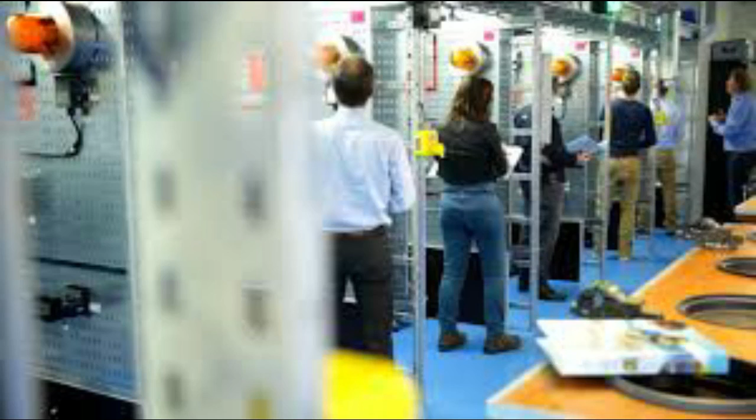CompEx training courses have been run in Aberdeen College since 1990 and have developed to the level of sophistication we have today. In its present form, the CompEx course has been in operation since August 1994, designed and constructed specifically for the national training of personnel who work with electrical installations and plant in hazardous and/or potentially explosive environments. The objective is to introduce candidates to operating procedures and techniques, and to give candidates and their employers confidence that they are competent to work on electrical apparatus in such environments. This competence, laid down nationally by industry, will help make your industry a safer one.

This first part will cover the nature of flammable materials, gas grouping, basic principles of area classification, temperature codes, ingress protection, standards, certification, and marking of explosive atmospheres.

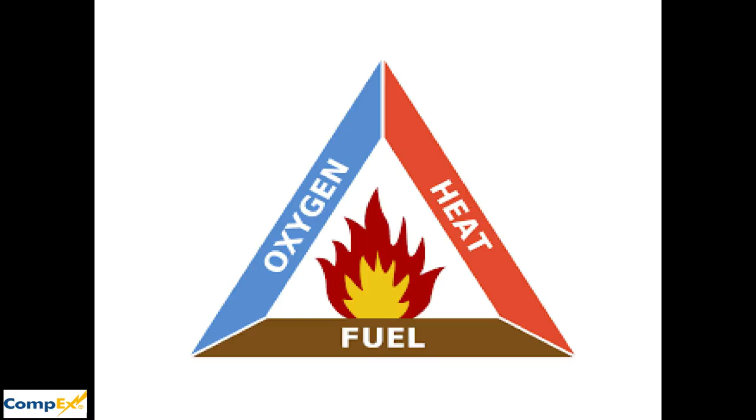First, a definition of the fire triangle. The fire triangle represents the elements which must be present before combustion can take place. Each point of the triangle represents one of the essential elements, which are: fuel, which can be in the form of a gas, vapor, mist, or dust.

Oxygen, plentiful in supply since there is approximately 21% by volume in air. And source of ignition, which can be an arc, spark, naked flame, or hot surface.

Chemical reaction is the interaction of two or more chemicals that produce one or more new chemical compounds, or alters the properties of the mixed chemicals. Most reactions require heat, pressure, radiation, other conditions, and/or the presence of an accelerator.

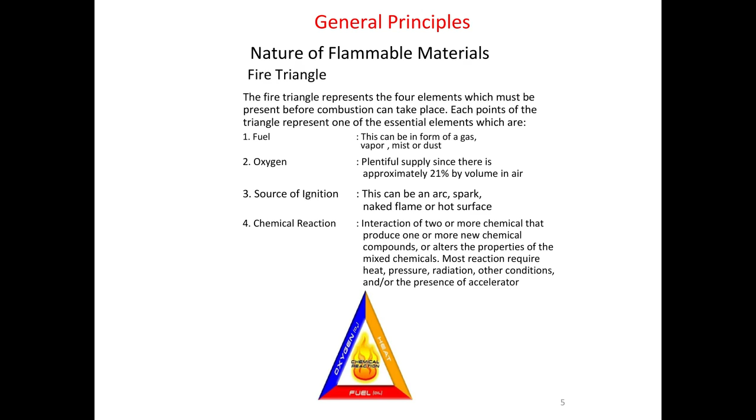Now we are going to go through the nature of flammable materials. Let us first understand how combustion happens. Combustion will take place if all three elements, in one form or another, are present, the gas and air mixture is within certain limits, and the source of ignition has sufficient energy.

The removal of one element is sufficient to prevent combustion, as is the isolation or separation of the source of ignition from the gas and air mixture. These are two techniques used in explosion-protected equipment.

Other protection techniques allow the three elements to coexist and either ensure that the energy of the source of ignition is maintained below specific values, or allow an explosion to take place and contain it within a robust enclosure. These techniques are addressed in the various sections of this manual.

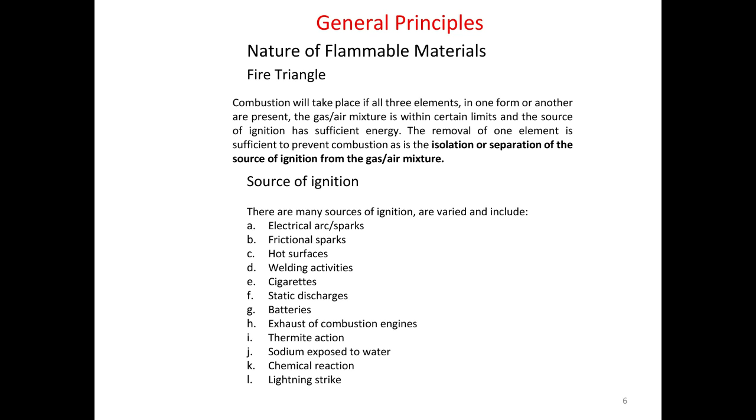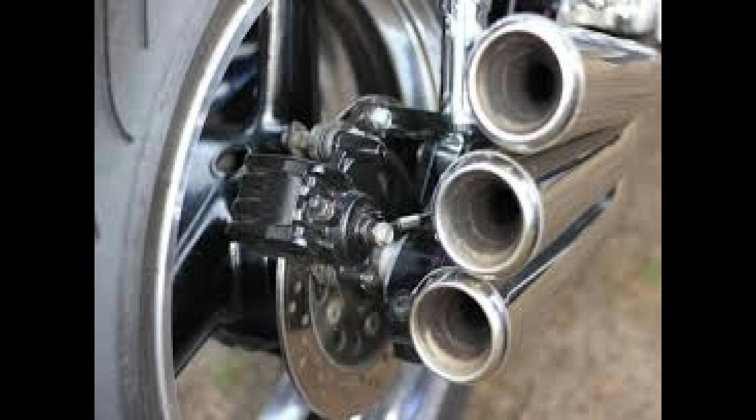There are many sources of ignition, varied and including electrical arcs/sparks, frictional sparks, hot surfaces, welding activities, cigarettes, static discharges, batteries, exhaust of combustion engines, thermite action, sodium exposed to water, chemical reaction, and lightning strikes.

Combustion will only occur if the flammable mixture, comprising fuel in the form of a gas or vapor, and air, are within certain limits. These limits are the lower explosive limit (LEL) and the upper explosive limit (UEL), and between these limits is known as the flammable range.

An everyday example of this is the carburetor of a petrol engine, which must be tuned to a particular point between these limits in order that the engine may function efficiently.

Lower explosive limit: when the percentage of gas by volume is below this limit, the mixture is too weak to burn, i.e. insufficient fuel and/or too much air.

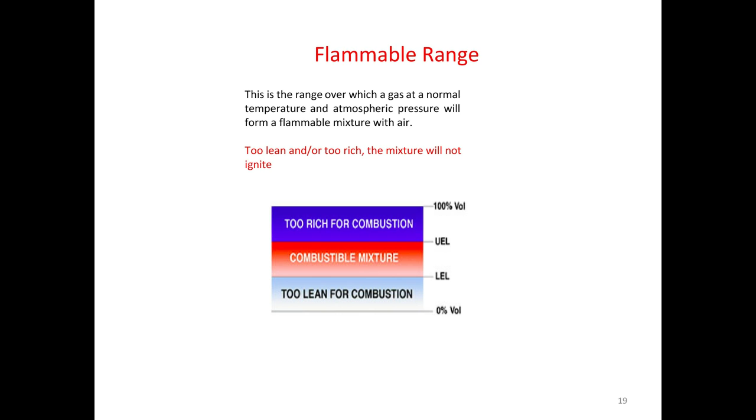Upper explosive limit: when the percentage of gas by volume is above this limit, the mixture is too rich to burn, i.e. insufficient air and/or too much fuel. Too lean and/or too rich, the mixture will not ignite.

Different gases or vapors have different flammable limits, and the greater the difference between the LEL and the UEL, known as the flammable range, the more dangerous the material.

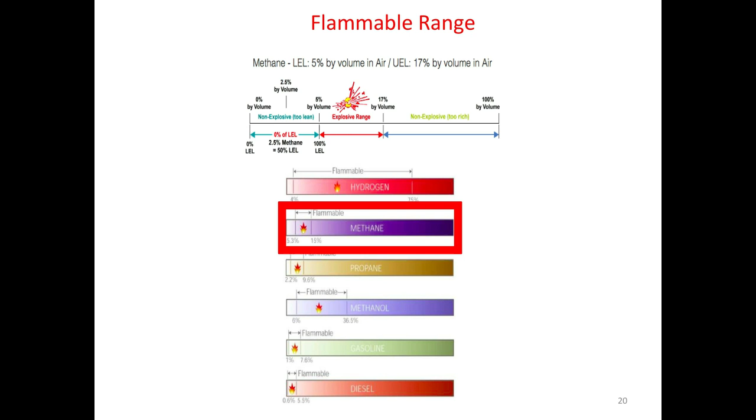An explosive, flammable atmosphere, therefore, only exists between these limits. Operational safety with flammable mixtures above the UEL is possible, but is not a practical proposition. It is more practical to opt...

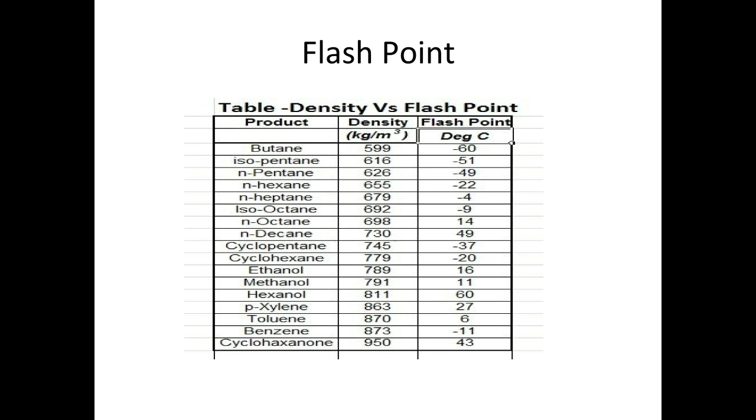An important definition in our course is the flash point, which is the lowest temperature at which sufficient vapor is given off a liquid to form a flammable mixture with air that can be ignited by an arc, spark, or naked flame. Typical values are given below.

The second important definition is auto-ignition temperature. Ignition temperature is defined as the minimum temperature at which a flammable material will spontaneously ignite. Ignition temperature, formerly known as auto-ignition temperature, is an important parameter since many industrial processes generate heat.

Careful selection of electrical equipment will ensure that the surface temperature produced by the equipment, indicated by the T-rating, will not exceed the ignition temperature of the flammable atmosphere which may be present around the equipment. Typical values of ignition temperature are:

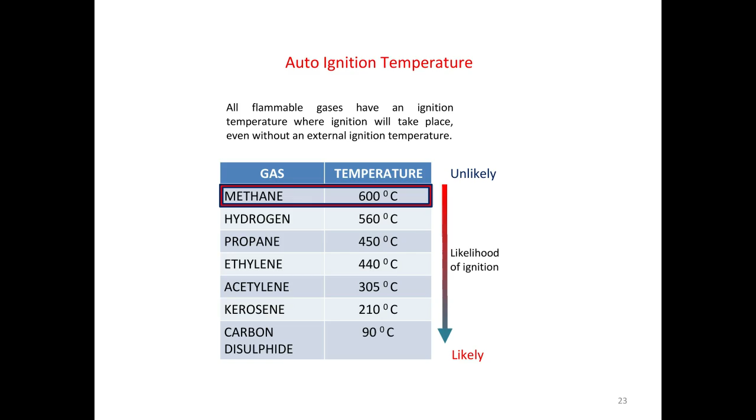Does the material density have a role? Of course, if a flammable material is released, it is important to know whether the material will rise or fall in the atmosphere. The different flammable materials are compared with air and allocated a number to denote their relative density with air. Since air is the reference, its relative density is 1, so that for a material twice as heavy as air, its relative density will be 2.

Therefore, materials with a relative density less than unity will rise in the atmosphere, and those greater than unity will fall in the atmosphere. Materials which rise in the atmosphere can collect in roof spaces, and those which fall, such as butane or propane, can drift along at ground level and possibly into a non-hazardous location, or may collect in locations lower than ground level without ever dispersing.

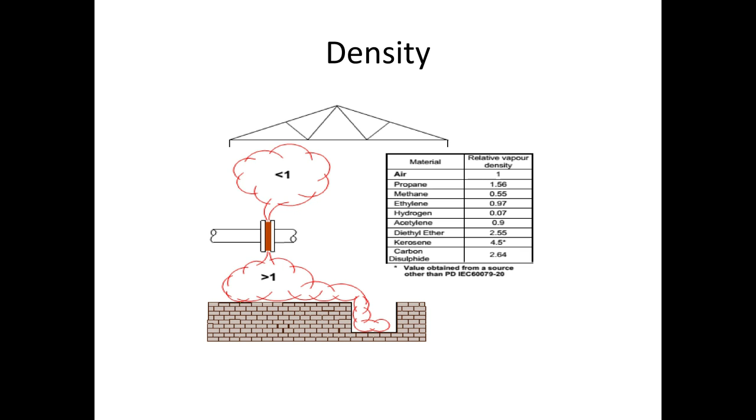Such locations should be well ventilated in order to avoid ignition due to a stray spark or a discarded cigarette. Knowledge of where a flammable material will collect ensures that gas detectors, when fitted, will be located at the correct level and ventilation is directed accordingly.

Hazardous area classification: A hazardous area is defined as an area in which an explosive gas atmosphere is present, or may be expected to be present, in quantities such as to require special precautions for the construction, installation, and use of apparatus. A non-hazardous area is defined as an area in which an explosive gas atmosphere is not expected to be present in quantities such as to require special precautions for the construction, installation, and use of apparatus.

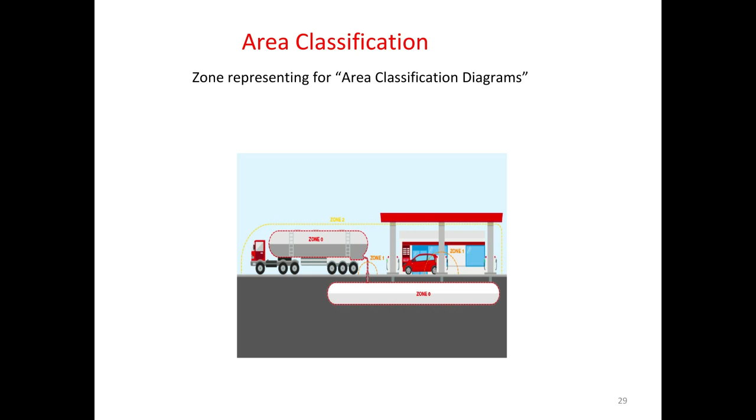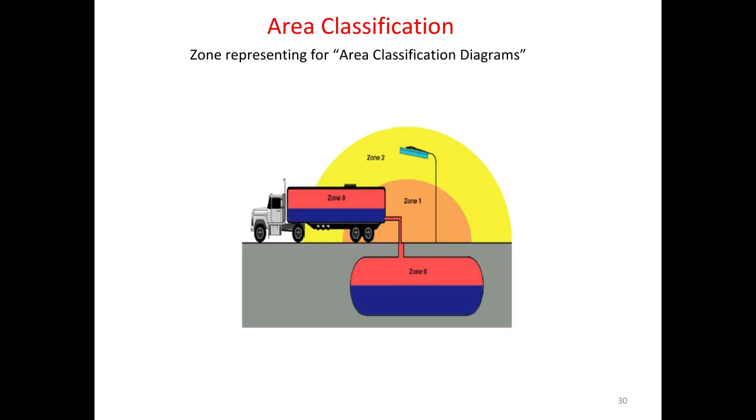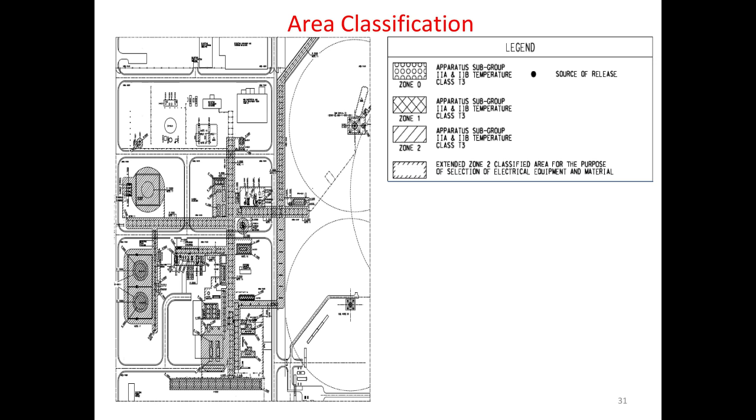What do zones mean? Zoning is a means of representing the frequency of occurrence and duration of an explosive gas atmosphere, based on the identification and consideration of each and every source of release in the given areas of an installation. Zoning will have a bearing on, and simplify the selection of, the type of explosion-protected equipment which may be used. Hazardous areas are, therefore, divided into 3 zones which represent this risk in terms of the probability, frequency, and duration of a release.

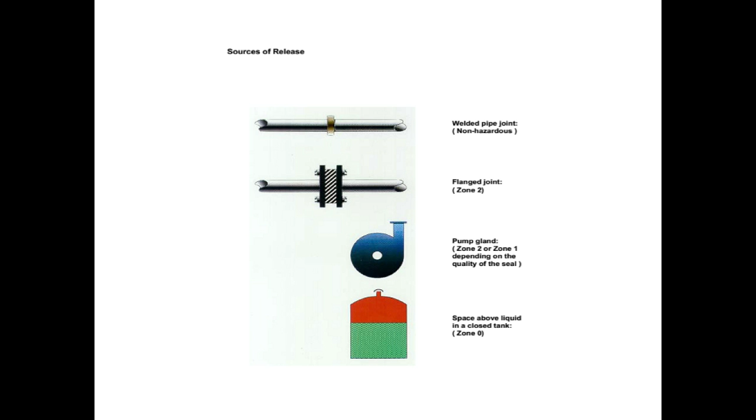The 3 zones, as defined in BS EN 60079-10, Electrical Apparatus for Explosive Gas Atmospheres, Part 10: Classification of Hazardous Areas, are as follows.

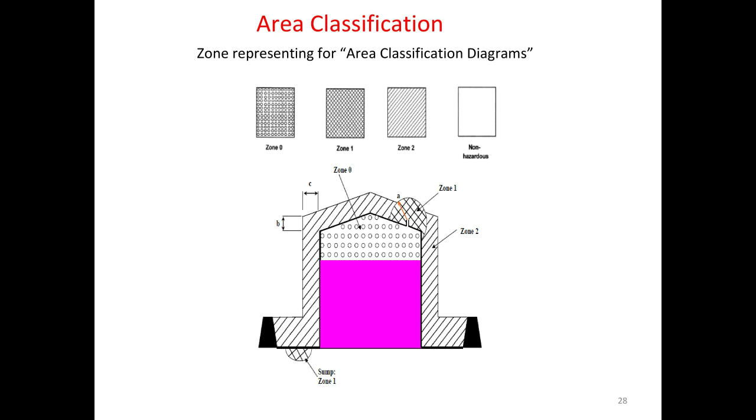Zone 0: in this zone, an explosive gas atmosphere is continuously present, or present for long periods. Zone 1: in this zone, an explosive gas atmosphere is likely to occur in normal operation. Zone 2: in this zone, an explosive gas atmosphere is not likely to occur in normal operation, and if it does occur, is likely to do so only infrequently and will exist for a short period only.

Although not specified in IEC 60079-10, but quoted in API RP 505, the duration of a gas release, or a number of gas releases, on an annual basis - 1 year comprises circa 8,760 hours - for the different zones is as follows: Zone 2, up to 10 hours. Zone 1, 10 to 1,000 hours. Zone 0, over 1,000 hours.

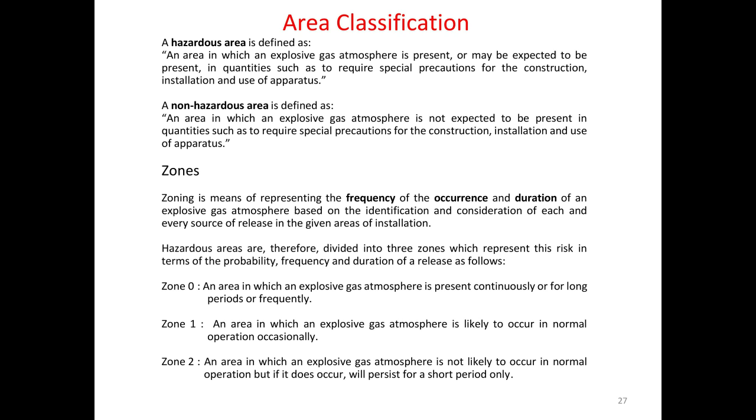The other method involved tests using, for example, a special flame-proof enclosure in the form of an 8-liter sphere which was situated inside a gas-tight enclosure. Both halves of the sphere had 25mm flanges, and a mechanism enabled the gap dimension between the flanges to be varied. During tests, the area inside and outside the sphere were filled with the gas in its most explosive concentration in air, and by means of a spark plug, the gas inside the sphere was ignited.

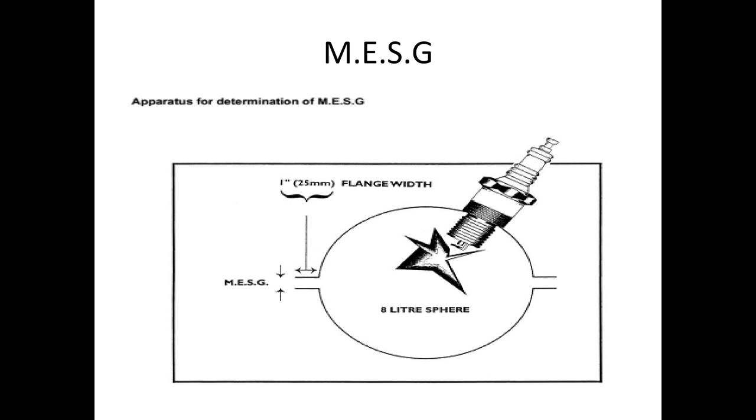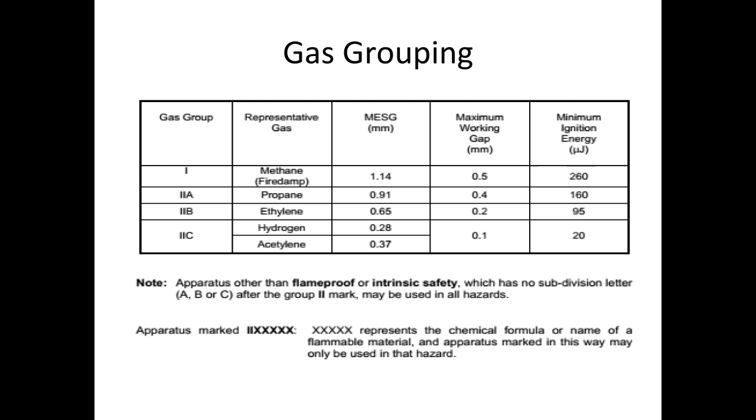It is important to note that the MESG values are not used for the design of flame-proof apparatus, only the maximum working gaps. The table also shows that these flammable materials fall into the same order for both tests, i.e. in a relative context, hydrogen and acetylene present the most risk and propane the least risk in terms of minimum ignition energy and MESG.

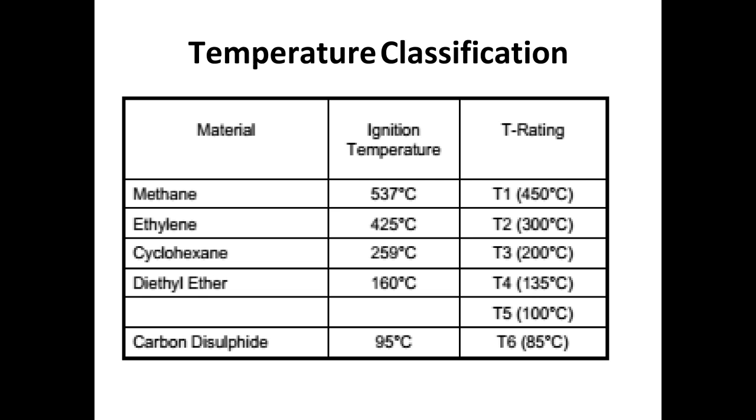Temperature classification. Approved electrical equipment must be selected with due regard to the ignition temperature of the flammable gas or vapor which may be present in the hazardous location. Apparatus will usually be marked with one of the temperature codes shown in the table below.

In the table, it will be observed that for each material, the T-rating temperature is below the ignition temperature of the flammable material. Moreover, the T-rating temperatures are based on a maximum ambient rating of 40 degrees Celsius as far as the UK is concerned.

For example, apparatus classified T5, based on a 40 degrees Celsius ambient rating, will have a maximum permitted temperature rise of 60 degrees Celsius. In order to avoid infringement of the apparatus certification, the ambient rating must be compatible with environmental ambient temperatures, and the temperature rise not exceeded.

A further consideration is apparatus for use in hotter climates, typically found in Middle and Far Eastern countries, which will usually require ambient ratings greater than 40 degrees Celsius. Apparatus for use in colder, Arctic, climates will require a much lower limit to the ambient temperature range, which may be as low as -50 degrees Celsius.

The lower the T number, the higher the temperature. Hottest is worst, coolest is best. For example, if the selected highest T class is T3.

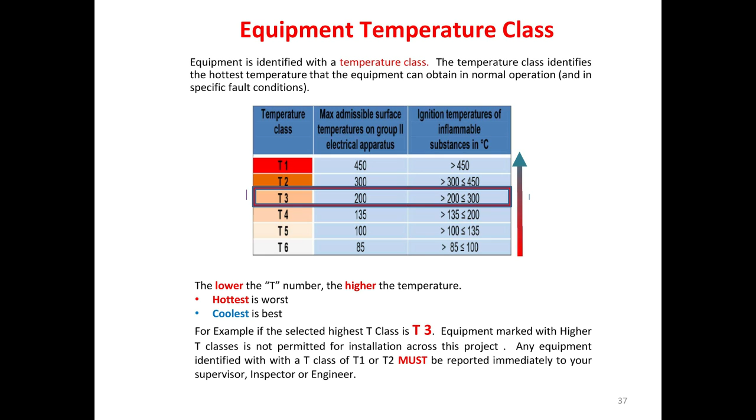Equipment marked with higher T classes is not permitted for installation across this project. Any equipment identified with a T class of T1 or T2 must be reported immediately to your supervisor, inspector, or engineer.

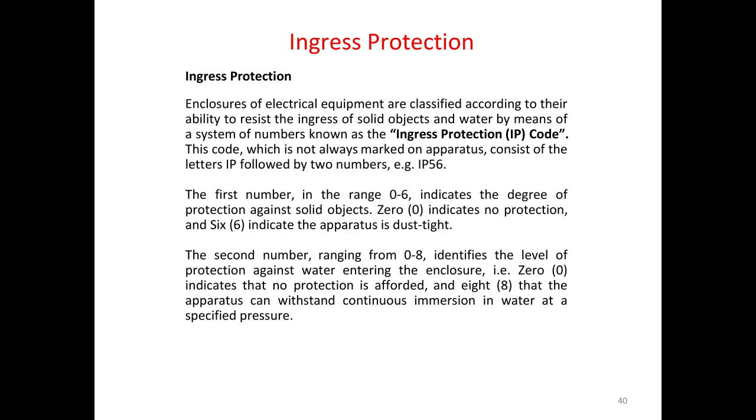Degrees of protection provided by equipment. IP code, ingress protection. Enclosures of electrical equipment are classified according to their ability to resist the ingress of solid objects and water by means of a system of numbers known as the International Protection, IP, code.

This code, which is not always marked on apparatus, consists of the letters IP followed by two numbers, e.g. IP56. The first number, in the range 0 to 6, indicates the degree of protection against solid objects, and the higher the number the smaller the solid object that is prevented from entering the enclosure. 0 indicates no protection and 6 indicates the apparatus is dust tight.

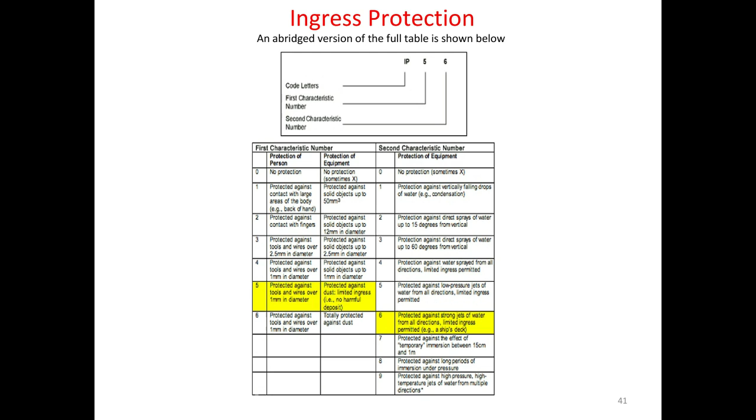The second number, ranging from 0 to 8, identifies the level of protection against water entering the enclosure, i.e. 0 indicates that no protection is afforded, and 8 that the apparatus can withstand continuous immersion in water at a specified pressure.

Equipment marking, labels, and IECEx equipment protection levels, EPLs. What are the reasons for product certification? First, to demonstrate product quality with regard to the ability of the apparatus to function safely in a hazardous environment. Second, to enhance market acceptability by inspiring confidence in those involved in the selection, purchase, installation, operation, and maintenance of approved/certified products. Third, to improve quality and safety control.

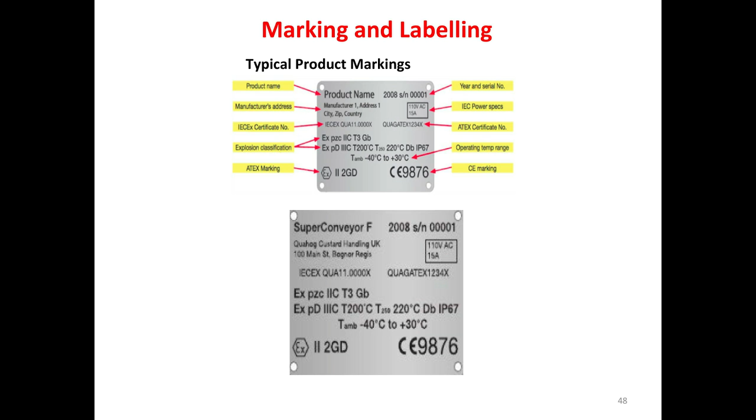The ATEX Directive 94/9/EC, ATEX 95, was adopted by the EC to enable free trade of products between member states through alignment of technical and legal requirements. The directive applies not only to electrical equipment but also to mechanical equipment and protective systems used in the presence of potentially explosive atmospheres containing gases/vapors or combustible dusts.

The ATEX Directive 99/92/EC, ATEX 137, commonly known as the Use Directive, is implemented in the UK via the Dangerous Substances and Explosive Atmospheres Regulations 2002, DSEARs. Prior to the introduction of the ATEX directives on July 1, 2003, apparatus for use in hazardous areas were marked as illustrated below.

Apparatus complying with the ATEX directives, however, will still be marked in this way but will have additional markings to indicate that the apparatus conforms with the ATEX directives.

Apparatus approved/certified as providing a method of protection for use in hazardous locations are required to display the following markings: the symbols Ex, and the type of protection used, D, E, N, and the gas group IIA, IIB, or IIC, and the temperature rating T1, T2, etc.

Example 1, marking is Ex d IIB T3. In this example, equipment marked thus, Ex, as far as Europe was concerned, could only be used in the UK because it had been constructed to the British standard BS 4683, which was not a harmonized European standard.

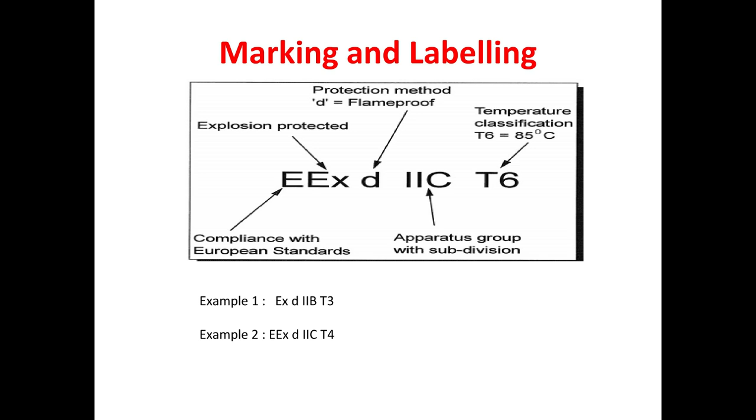For BS 4683 equipment, the IEC equivalent standard, i.e. IEC 79-1 in this example. IECEx compliant equipment will have standardized certification numbers which will include the abbreviation of the notified body's name followed by the acronym IECEx.

Certificate issuer, the year of certification, serial number, and either of the suffix X or U where applicable, as shown below. IECEx BAS 06.

1234X. First part is the IECEx marking. Second part is the certificate issuer. Third part is the year of certification. Fourth part is the serial number.

You will notice a very important letter mentioned at the end of the certification number, which can sometimes be X or U. The X symbol at the end of the certificate number must be put when the device has peculiar conditions for safe use.

Let's do some examples. There may be particular rules if the device is used in specific environmental conditions, such as in case of subnormal temperature, or conversely in case of very high temperatures, or the gaskets may require specific treatments if exposed to particularly aggressive chemical environments.

The conditions defined as normal for all equipment by the standard are: temperature from -20 degrees Celsius up to +60 degrees C; pressure from 80 kPa (0.8 bar) up to 110 kPa (1.1 bar); air with normal content of oxygen, usually 21% V/V.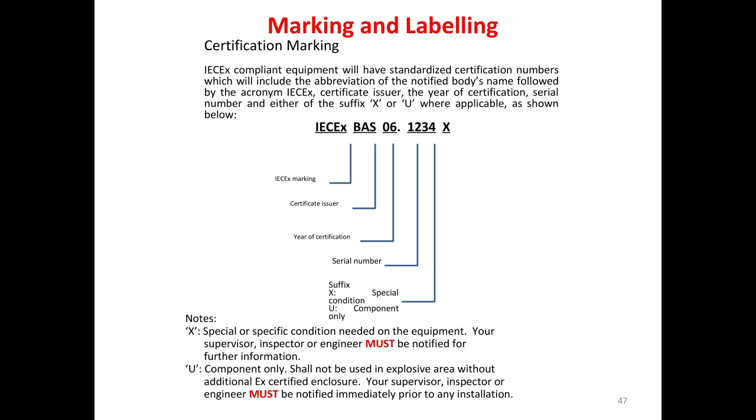In conclusion, we remind that U and X symbols must not be present at the same time on the same plate, because the previous one indicates a component and the second one a device.

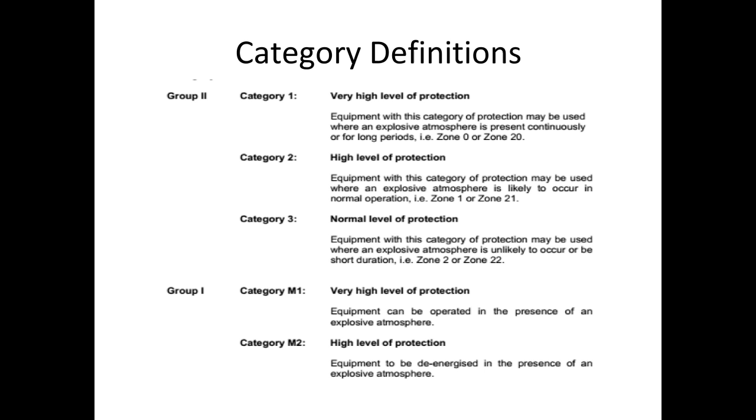The introduction of equipment protection levels, EPLs, enables a risk assessment approach to be implemented for the selection of explosion-protected equipment in hazardous areas. This provides an alternative to the traditional method of selecting equipment to suit the zone, which does not take into consideration the consequences of an explosion.

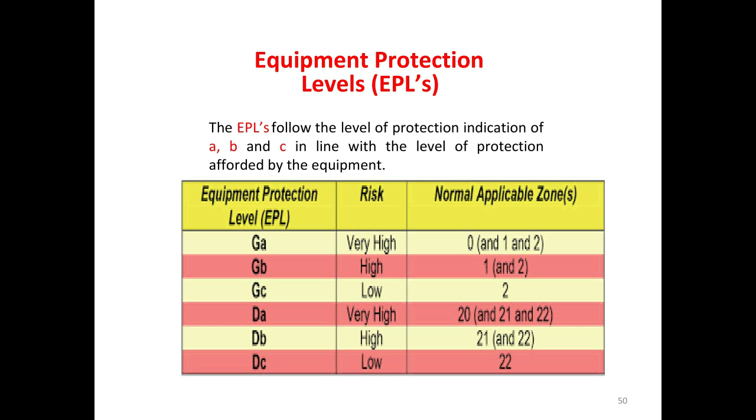The table below shows the zones where both ATEX categories and EPLs may be used from a traditional selection approach. Equipment protection levels, EPLs, are available for both gases and vapors and also combustible dusts as illustrated in the table below. Equipment marked G is for use in flammable gases, vapors or mists, and marked D for use in combustible dusts.

EPL definitions, Group 2 gases. GA: equipment for explosive gas atmospheres, having a very high level of protection, which is not a source of ignition in normal operation, expected faults, or when subject to rare faults.

GB: equipment for explosive gas atmospheres, having a high level of protection, which is not a source of ignition in normal operation, or when subject to faults that may be expected, though not necessarily on a regular basis.

GC: equipment for explosive gas atmospheres, having an enhanced level of protection, which is not a source of ignition in normal operation and which may have some additional protection to ensure that it remains inactive as an ignition source in the case of regular expected occurrences, for example, failure of a lamp.

Group 3 dusts. DA: equipment for combustible dust atmospheres, having a very high level of protection, which is not a source of ignition in normal operation, or when subject to rare faults.

DB: equipment for combustible dust atmospheres, having a high level of protection, which is not a source of ignition in normal operation, or when subject to faults that may be expected, though not necessarily on a regular basis.

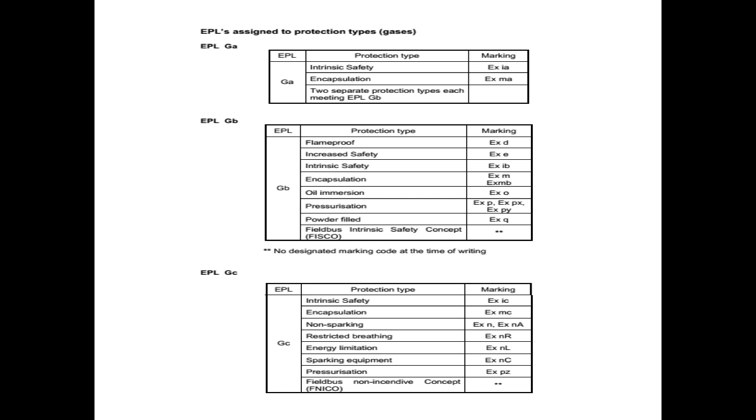DC: equipment for combustible dust atmospheres, having an enhanced level of protection, which is not a source of ignition in normal operation and which may have some additional protection to ensure that it remains inactive as an ignition source in the case of regular expected occurrences.